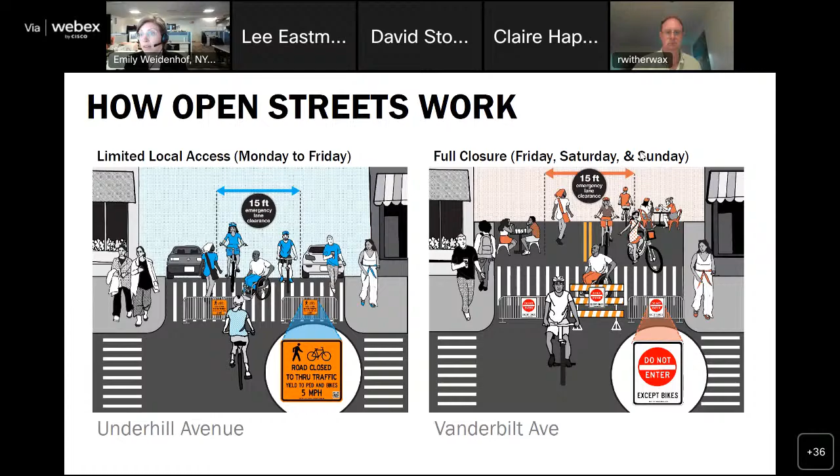Again, we're going to talk about how we're kind of moving beyond the barricade and get into greater detail with you this evening for your feedback. And then we also have the full closure, which is on Vanderbilt Avenue, which is the Friday evening, Saturday and Sunday closure. And with that, I'm going to turn it over to my colleague Kyle to talk us through our community outreach and engagement. Thank you, Emily.

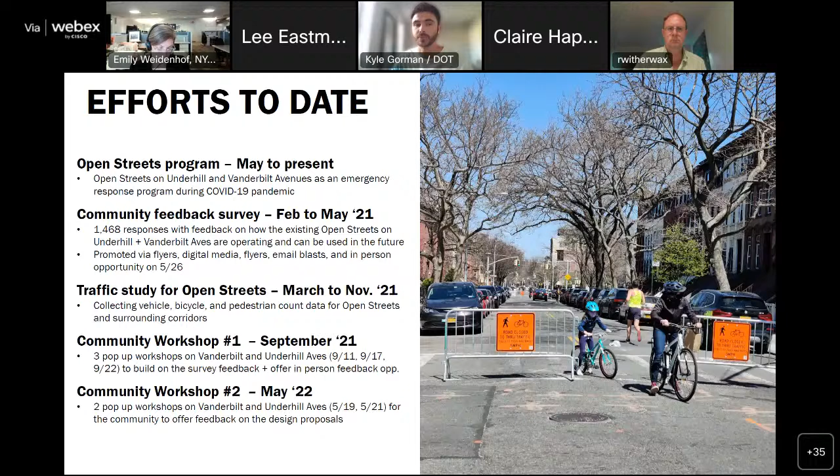Also, we've been doing a lot of community in-person workshops now that lots of us are able to be vaccinated and in-person gatherings are a little bit more safe to do. We have been able to do a series of workshops. The first in September 2021, we did 3 workshops on both Underhill and Vanderbilt, and then we did a second series of workshops back in May, just last month, 2 workshops, one was on Underhill and Vanderbilt. I'll summarize all of this outreach data in the coming slides.

This particular survey data has actually already been presented to the community board when I was here back in September 2021. But this was the first set of outreach that we did, where we heard from nearly 1,500 different members of the community, 80% of which lived within the confines of Community Board 8.

Most folks indicated that they're living nearby these open streets. They visit the businesses, visit friends, family, work, medical facilities, and all the different types of places that we all go in our day-to-day lives.

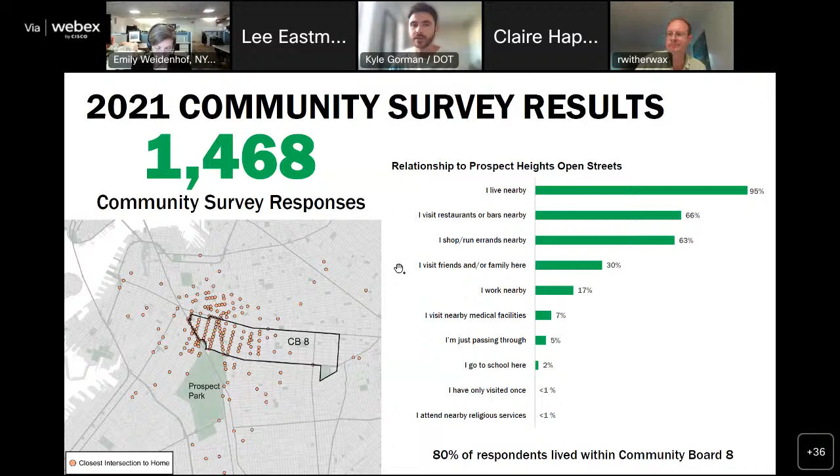We asked pretty pointedly to the public, would they like to see different types of design changes and other treatments to make these open streets in Prospect Heights bike and pedestrian priority corridors? A full 86% of folks did say that they did want to see those changes made, and those changes meant a lot of different things to a lot of different people.

They wanted to see primarily more space for walking, supporting businesses through outdoor dining, coming together in a safe way through socially distanced gatherings, and other types of programming and other layers that people suggested.

So building on that particular feedback from the survey we did a little over a year ago, we hosted a series of 3 workshops back in fall 2021. This is where we started to get a little bit more nuanced with folks about the different types of block typologies and design changes that people wanted to see on these open streets.

We offered a couple different toolkit items that are within the DOT public space and wider DOT transportation toolkit. People really wanted to see a lot of different things, which is good because we have a lot of blocks here to work with on the open streets on Underhill and Vanderbilt.

After doing all of that engagement, we were able to start to formulate a little bit more of a firmer plan and build out what all of these different design changes would be for both Underhill and Vanderbilt. When we held the workshops last month, one was on Underhill Avenue, the other was on Vanderbilt Avenue.

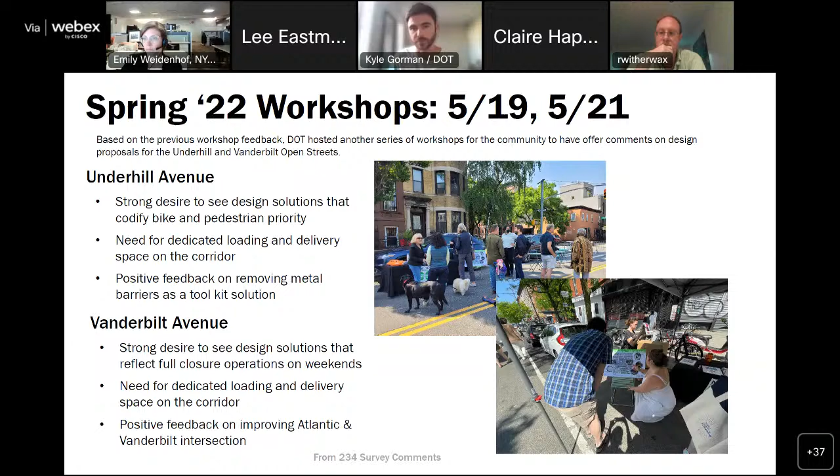And then there was also a lot of great feedback that we heard about improving the Atlantic and Vanderbilt intersection, and we'll touch on that in the coming slides.

Moving on to the real meat and potatoes of tonight, we'll be talking next about the design proposal and some operational considerations. Many of you are already familiar, but we continue here in the new Adams administration with Vision Zero. We are building on the success of nearly almost a decade of work that we've been doing with Vision Zero, and just to briefly sum it up, it's an initiative to eliminate death and serious injuries on our streets.

So making the streets safe for all road users—that's pedestrians, bikes, and vehicles. Both Underhill and Vanderbilt fall within a Vision Zero priority area for us. These are certain sections of the city based on a lot of different types of variables, but especially traffic data, that are designated as priority areas for the agency to work in.

Both corridors fall within this priority area. There are also certain priority intersections that DOT has designated through Vision Zero at Vanderbilt and Bergen, Vanderbilt and St. Mark's, Vanderbilt and Prospect Place, Vanderbilt and Park Place, as well as Underhill and St. Mark's Place. So we've specifically tried to look at what different types of treatments are available, not only holistically across the entire corridor, but at these specific Vision Zero intersections and priority areas for us.

Just looking at some of the crash data over the last 5 years, we only have crash data currently between 2016 and 2020. In terms of Underhill Avenue between Atlantic and Eastern Parkway, we've seen quite a number of injuries and severe injuries in that time. There is a certain type of data point that we use, called KSI, which refers to killed or severely injured, an aggregate of all different types of injury and fatality data.

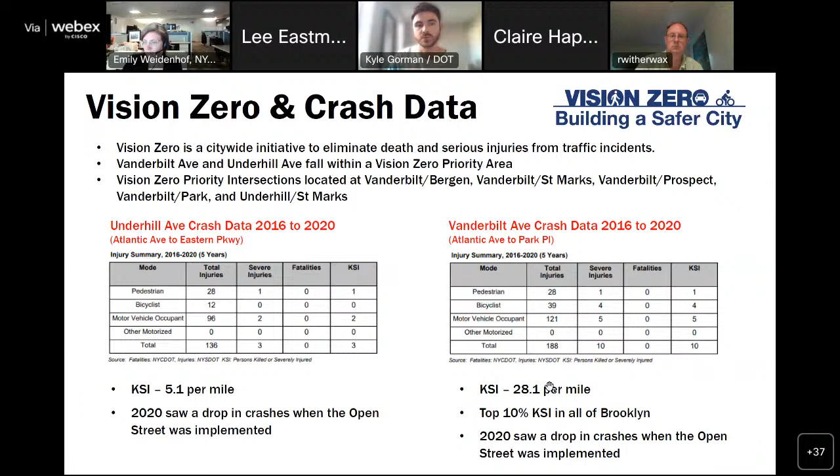On Vanderbilt, unfortunately, it does fall within one of the most dangerous streets in the city. It is actually the top 10% KSI in all of Brooklyn. We've seen a number of severe injuries amongst all different types of road users between 2016 and 2020. So we're really looking to add different types of traffic calming elements along both of these corridors to respond to this need for Vision Zero type treatments.

So lastly, before I hand it over to Dee to walk us through some of the design elements, I'm just going to briefly summarize what our overall plan is. There's a lot of different things that we're looking to implement here on Prospect Heights. We're really fortunate that we have two pretty long corridors that can see a lot of different typologies implemented along the entire stretch.

On Vanderbilt, just to summarize, we're really looking to not only make 24/7 traffic calming improvements, especially at the Vanderbilt and Atlantic intersection, but also add different types of amenities and operational items to really facilitate the closure that happens on the weekends in a more seamless way. So, adding different types of space that can be used for storage of different elements, but also has bike corrals, sidewalk extensions for pedestrian circulation, planters, and all of these great elements that not only make the street safer 24/7, but add different types of public realm amenities.

Similarly, on Underhill, we want to build on the success of what we've seen evolving as a bike and pedestrian priority corridor, looking at different types of new public space additions, turning certain blocks into pedestrian plazas, facilitating two-way cycling along the entire corridor, really touting this as the next bike boulevard here in New York City, adding other different types of traffic calming elements that Dee is then going to focus on.

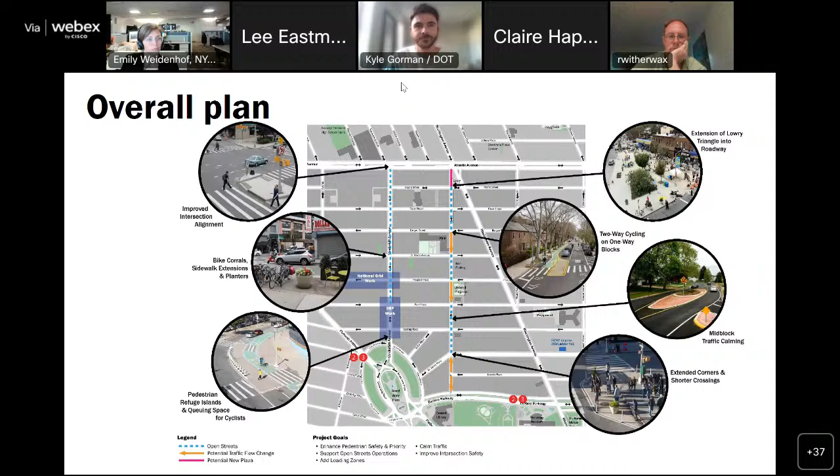Howdy, everyone. Just to make sure, can everyone hear me okay? Okay, sweet.

So let's talk about Vanderbilt first. And as Kyle and Emily have sort of explained, this is more about just supporting the existing open streets operation and addressing some of that intersection and corridor safety concerns.

So across the entire corridor, we've tightened down the intersections to the extent feasible, really taking away any excess roadway space that encourages people to make too fast or too wide of turns, and giving that sense across the corridor that it's more of a place.

The places where the biggest interventions would take place are on either end of the open street corridor, with the intersections of Atlantic and Plaza Street. At Atlantic, we're looking at a much larger intervention, still predicated on some pending traffic analysis, but trying to reshape that very intense intersection. At Plaza Street, it's more about going back to a design that's existed for a long time, and some of our toolkit for treating a street like that has evolved, so we can put the latest and greatest in, revisiting that intersection. Both of those intersection improvements allow us to improve the blocks feeding into it, creating a real gateway for the corridor.

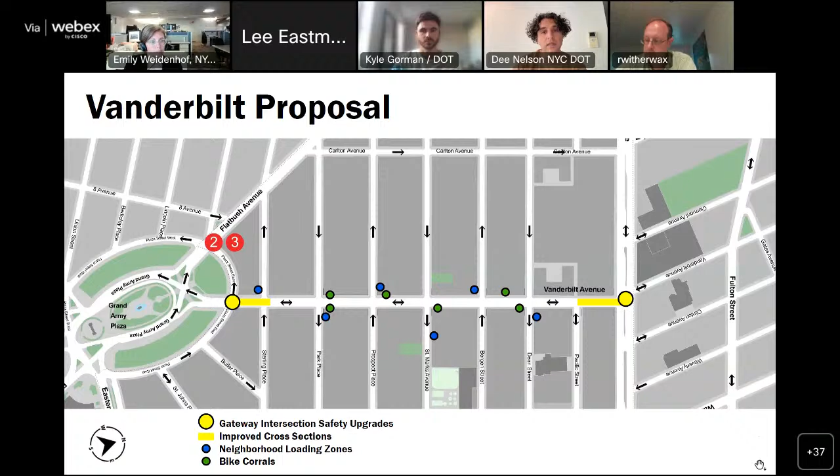So, next slide. Starting on the southern section with Plaza Street: right now, the existing two-way has been on the outside of the parking, as you can see on the approaches to the intersection on either side.

Since Plaza Street was implemented, we've evolved our toolkit to have the offset crossing treatment, where we have a pedestrian island between motor vehicle traffic and the bikeways. This allows pedestrians to cross bike traffic first, then queue, assess, and cross motor vehicle traffic, since they're traveling at different speeds. It's just a different character, and it's a real pedestrian safety benefit.

In addition, doing that not only makes it a little safer and calmer for cyclists, who now don't have to worry about a car coming into the bike lane because there's an offset between turning motor vehicles and the bike crossing for the driver to yield, but it also allows us to carve out turn lanes for people coming from Plaza Street into Vanderbilt from either direction.

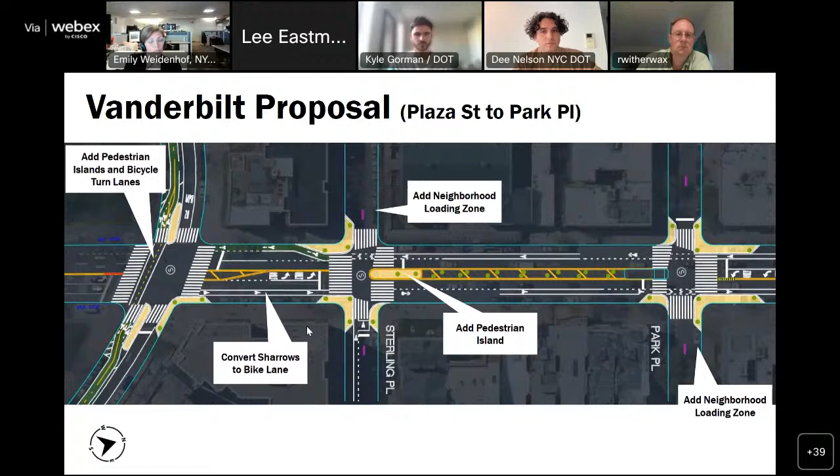And so again, having that sequencing of bike corrals alternating on either side of the intersection, on either side of the street for the most part, having bike corrals here at Park because it's sort of the beginning of the corridor, and some limitations between Park and Sterling. We have it on both sides.

Making sure that we preserve the existing loading zone for Food Town, which is self-evidently important.

On the couple of blocks where we have the left turn on either end, like revisiting Plaza Street, those entry tapers into the left turn lanes keep the number of cars that can actually be stored in the left turn lane, but make it a slightly tighter entry to come in, based on our current standards, just revisiting the street design. That's nice because it creates an opportunity space to come into the left turn lane faster than you otherwise would need to, allowing us to have more space separated from motor vehicle traffic.

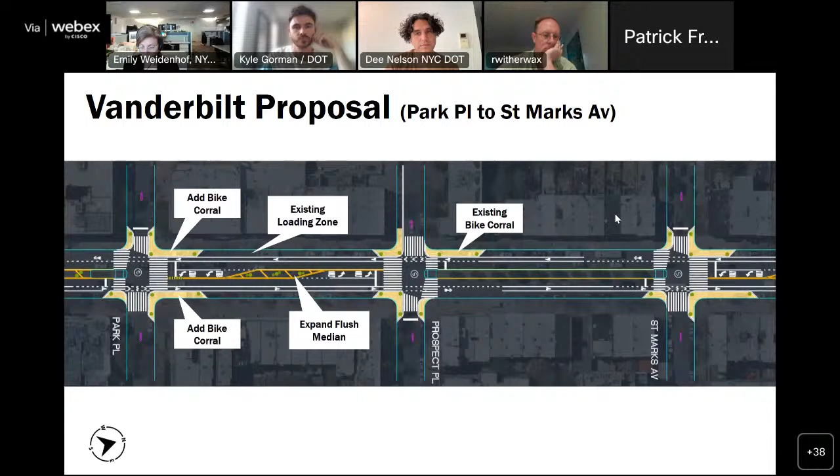If you want to go back to the previous slide, Kyle. So there is - this is an apology, there should be additional loading zones shown on this slide, I'm sorry that they're not on here. But yes, there is a loading zone on Park and a loading zone on Prospect proposed. Thank you for that question.

So going forward, there's an existing bike corral that has not been installed due to an open restaurant at Bergen. Because we're trying to do this sequencing, this repetition and rhythm throughout the corridor, instead of disrupting that open restaurant, you can see that to fit into the pattern, we're proposing other locations now.

Tightening those intersections down, tightening that painted median for the left turn bay entries, revisiting the pocket lane on Bergen where we can add green paint per standards that have evolved since that was installed originally. Putting in planters to both reinforce the geometry, but also to provide an aesthetic benefit to the corridor.

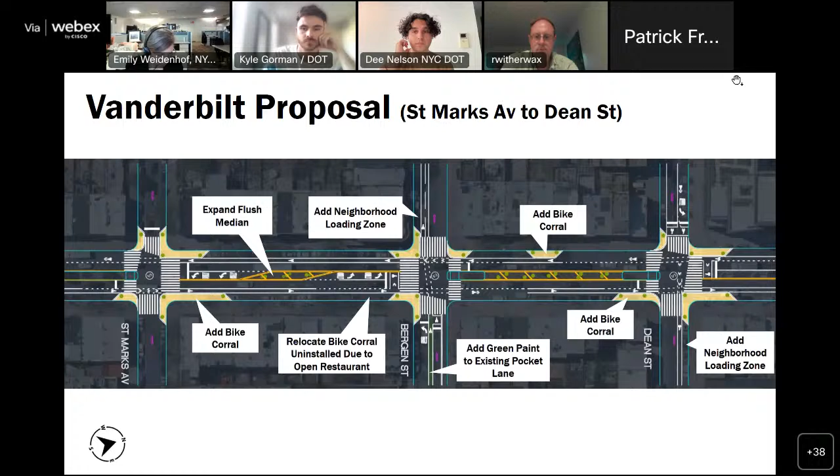And you can see, again, those neighborhood loading zones on the far side of each intersection. You can go to the...

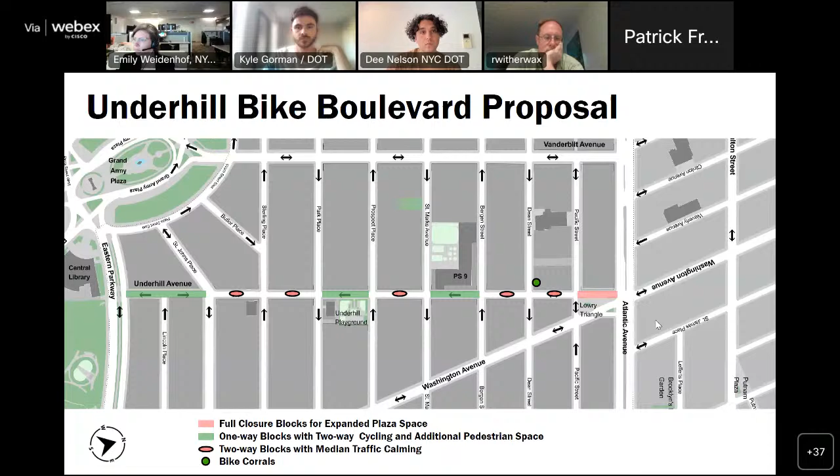So the design thinking for Underhill builds off of the experience we've had the last couple of years now of beginning to do bike boulevards in New York City. There was one implemented in each borough as the initial launch of the program, after a lot of years of advocacy trying to get New York City to do something a little bit different than just putting in a bike facility.

It's a little bit more about creating a sense and a vibe to a corridor that makes it feel very clear, so that drivers coming into the corridor have a pretty clear sense that there's something different going on here, trying to divert motor vehicle volumes away and get speeds really low, and just bringing people into the roadway, making it feel very safe and sort of neighborhoody.

We've been using these in locations that are more residential. It's not a treatment like Jackson Avenue in the Bronx or Netherland Avenue in Staten Island. These aren't major arterials. It's not the sort of treatment and way we approach the avenues in Manhattan, or even what we would be thinking on Vanderbilt. It's really something that fits the character and the network function of Underhill.

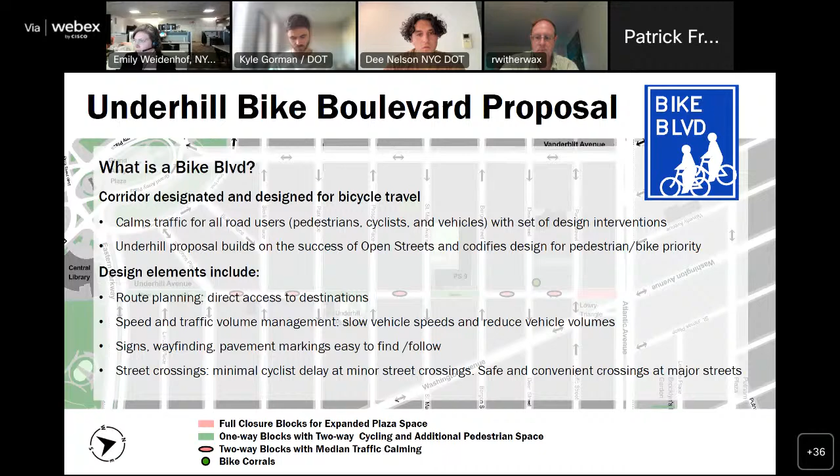You can go on to the next slide. So 39th Avenue in Sunnyside is a great example of this. You'll see a lot of similarities in this design to what we're proposing for Underhill.

An important thing to understand about Underhill design-wise is it is very narrow. Sort of all the existing elements of it are at or just under our minimums as an agency for the most part. 39th Avenue is a little wider, so this is maybe the version of this that has a little bit more breathing room, but you'll see it's very similar in concept between the two.

Here the street alternates between one way in one direction, one way in the other direction, and being two-way, to sort of divert some of that traffic off and make it so that there's still local access. If you need to do something on Underhill or on 39th Ave, you still can with a motor vehicle, but there's a clear sense of priority.

It's very easy to ride side by side. I think probably the best way to describe the bike boulevards for people who aren't familiar with them is that it's a street that you feel very comfortable going at a slow speed, biking with a friend, having a conversation, or teaching your kids how to ride a bike. It's that kind of facility, not commuting down Second Avenue from like FiDi to the Upper East Side.

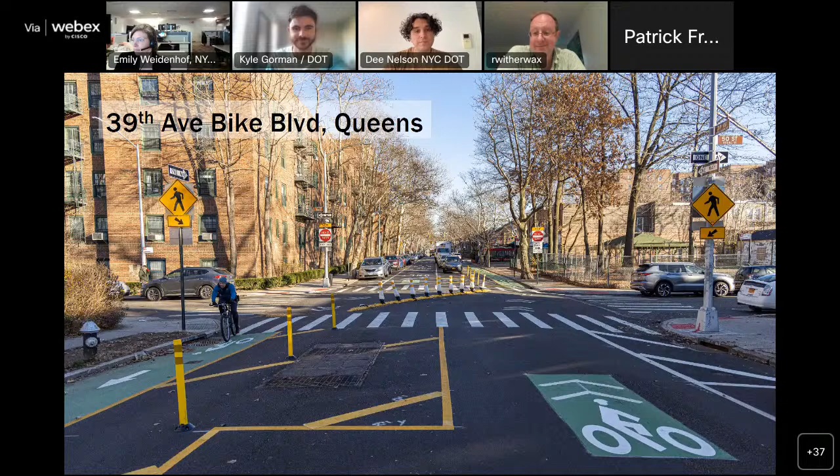Second Avenue goes southbound, if anybody caught that. First Avenue. So...

Going through the design at Eastern Parkway, having a little bit of a gateway treatment, where it's just very clear as you're approaching, reinforcing with a wider crosswalk and with a bike crossing, that you're approaching an intersection where there's a higher than usual expectation of cyclists and pedestrians in the roadway.

The most important thing that stands out is that motor vehicle access for these two blocks of Underhill at the south end would be from Lincoln Place, with two-way travel for cycling. FDNY can come into either block, accessing from Eastern Parkway and turning right to access the lower end, or coming from St. John's, they can always pull in. Because this is only for a block in either direction, there's still access for FDNY even from the opposite direction.

Having that two-way access maintained for cyclists, you can see on the Lincoln to St. John's Place block basically that same cross section as was shown on 39th Avenue in Queens.

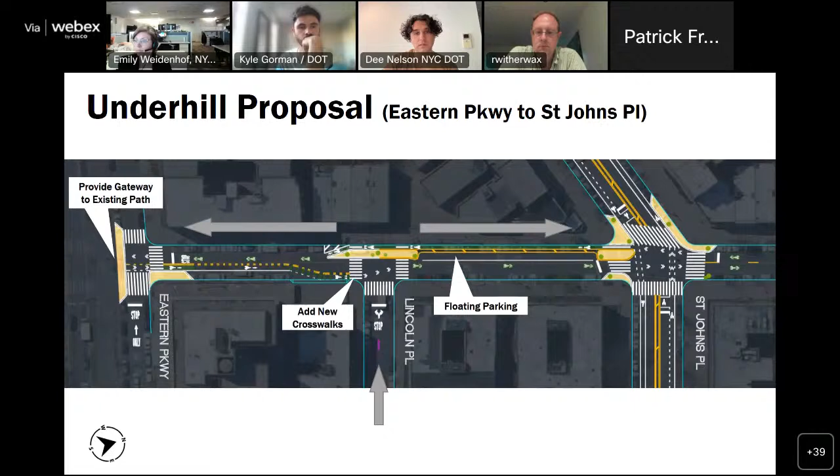So you just have fewer conflicts, wider crosswalks. It's just a more navigable intersection for non-motorized street users.

Getting into what the majority of the corridor looks like, you have the existing two-way blocks where we're doing median traffic calming, still tightening down like we did on Underhill with painted pedestrian extensions. But here, the only place that really fits while still allowing FDNY and DSNY to make turns is kind of one corner - the in-and-in corner of each intersection.

But that still allows, as you're driving up and down and approaching from the side streets, an opportunity to put planters and create a sense as you're approaching the street that you're coming to something special and different, not largely for processing motor vehicle traffic. So it signals to drivers ahead of time.

That's also a big part of the median traffic calming - it gives an element that visually breaks up the corridor, so you don't get a sense that you can just drive through trying to catch the lights as fast as you can. It creates a rhythm of space, beautiful, interesting things, rather than that tunnel vision of being able to speed down the corridor when you have the green.

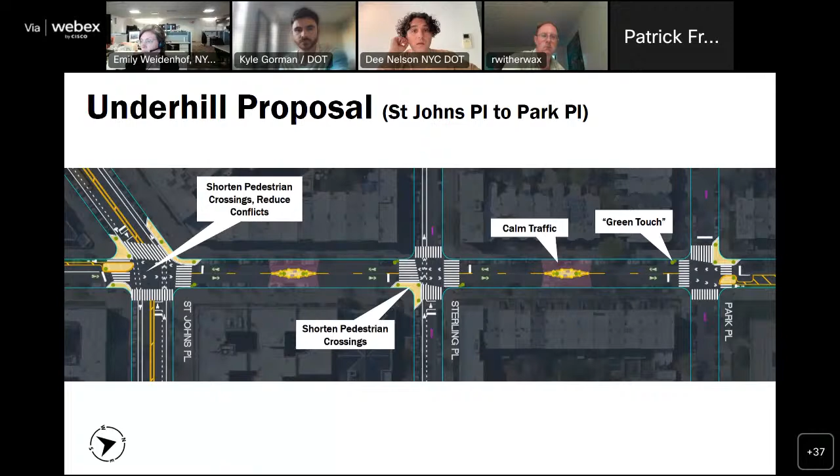Those, due to some uniqueness and just trying something different, are a lot tighter, and this meets more the existing standards of where we've done chicanes throughout the city that haven't faced those same issues. A good example, geometrically, is at 6th Avenue and 21st Street.

These are built out in concrete. The ones we're proposing would instead use paint and epoxy gravel as fill in the space, and then planters, granite blocks, and flexible delineators to reinforce it. It can be a nice space to sit and enjoy, but still gives that horizontal deflection, to use a technical term, that will slow vehicles down.

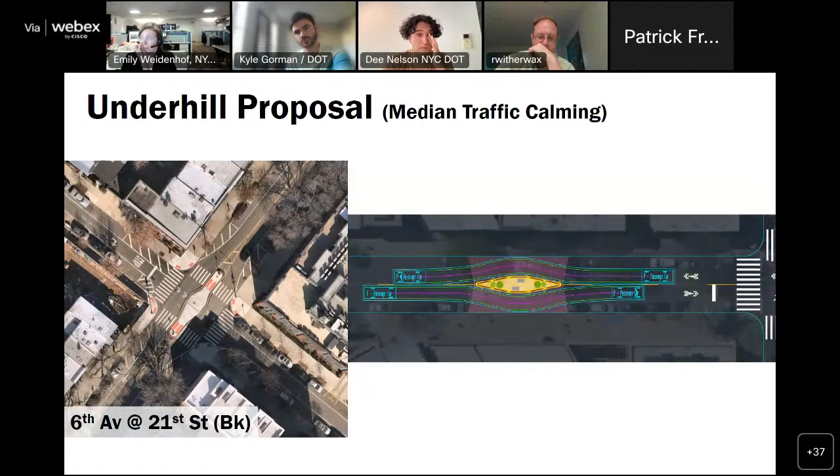This is actually something that's been in FHWA's traffic calming e-primer for a long time. We haven't really used it mid-block in the city much. We've done it more at intersections because we tend to do this at wider streets. On Underhill, you can't fit it into the intersections without having more significant impacts on traffic flow.

So you can see, if you're approaching northbound to, let's say, Park, with the one-ways, you would have to turn to go eastbound on Park Place. But since we've seen the majority of traffic going through Underhill southbound, and that's kind of its prevailing function as we've looked at the traffic numbers, we've maintained that and gotten rid of the northbound.

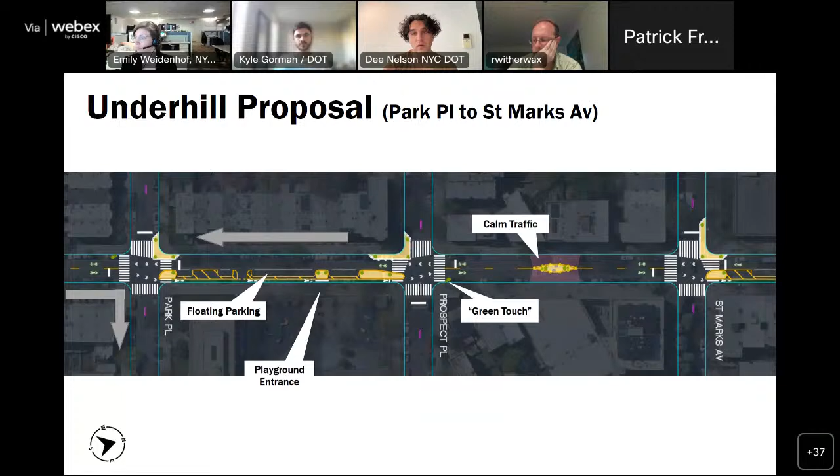That has less of an impact and allows us to reallocate that space here in front of the playground, where we can even have a crossing and a little island to make it accessible from the roadway at the very entrance to the playground, and allow contraflow cyclists to still continue through the corridor. We'll tighten down intersections where we can on that one corner per block, put in green touches where we can't tighten down the intersection, and have median traffic calming on the two-way blocks.

You can go to the next.

Same thing in front of PS9, where the school entrance has a very clearly delineated space, and the same sort of traffic flow. Both of the southbound blocks occur at cross streets that divert you to the east, so it functions very similarly, tightening down the intersections. Underhill is much more just a repeating pattern, block by block.

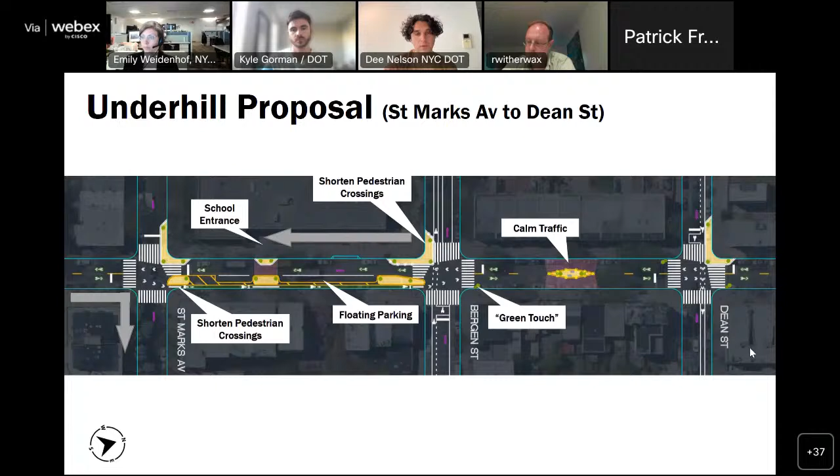Adding that bike corral where it was requested at Dean Street, which is convenient because that also is the corner of the intersection that works geometrically to have a bulb out. So it ties into that bulb out.

And then at the triangle, that existing driveway, we've spoken with representatives of the property owner and they would be interested in abandoning it. So there's a real opportunity here to extend the triangle all the way through the street and make the frontage to that block, Washington, and create a good end to the corridor, furthering the geometric improvements that were done years ago at Washington and Atlantic to simplify that intersection and make it a little more predictable. We still see that illegal left turn being made into Underhill, when right now you're only supposed to approach it from the eastbound right.